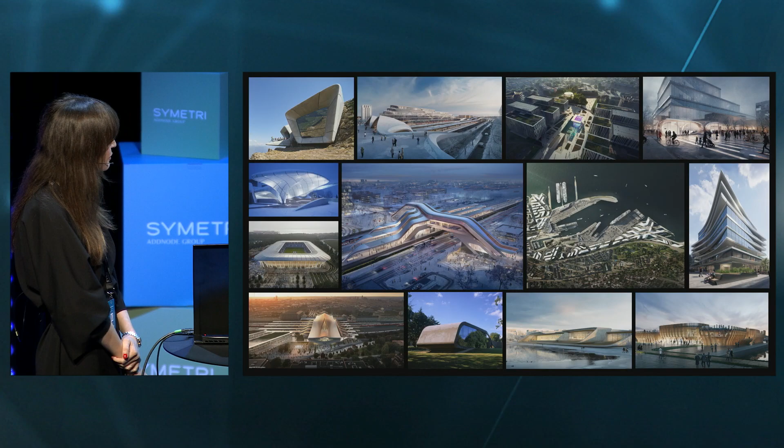We've been actively working in the Nordics on various projects, from master plans, transportation projects, sports centers, culture buildings. And we're really happy to present the two metro stations in Oslo for the Fornebu line. The Fornebu line project is a new metro extension in a continuous tunnel system between Majorstuen and Fornebu Peninsula. Zaha and A-Lab, together with PGF for FOB, have been designing two stations out of 6, Fornebu and Fornebuporten.

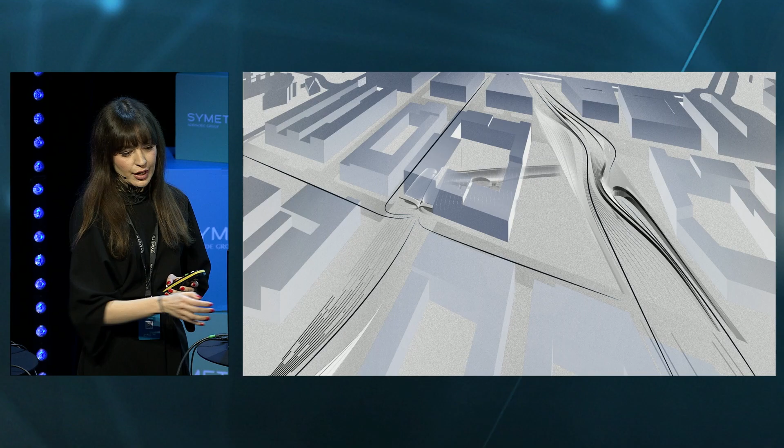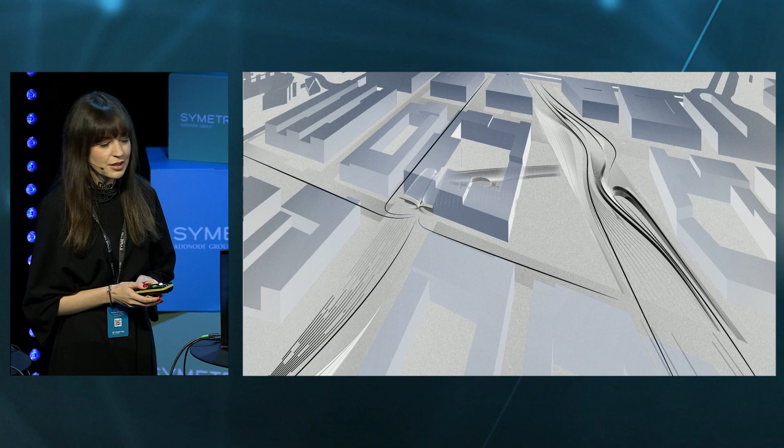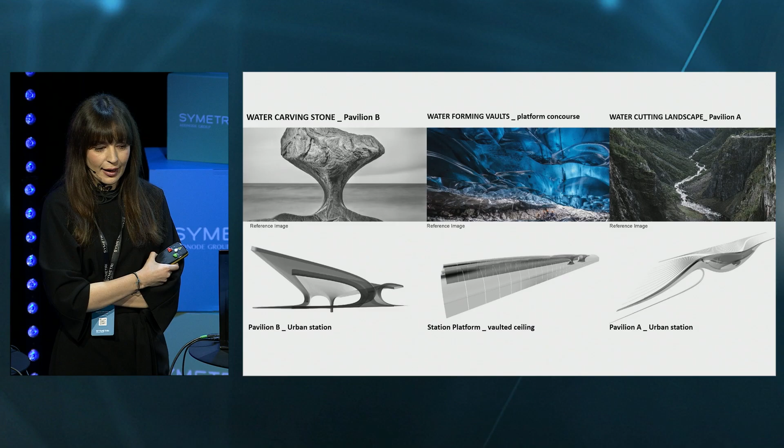The Fornebu station is also the final station on the line, and it aims to become an architecture attraction within this emergent urban development. The design is inspired by how Norway's landscape has been shaped by pressure and currents of water and wind and glaciers for thousands of years. We took the inspiration from these natural forces, and the design is using the landscape as a unifying element, shaping spaces and movement for people.

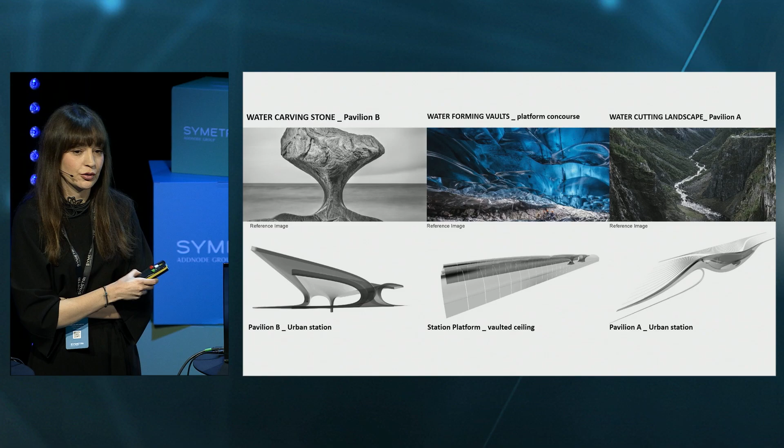The Fornebu Railway can be seen as an underground river that connects places and individuals. It results in a concept that is robust, urban, but very simple, with a strong architectural identity tied to the context. Then this underground landscape is creating spaces and shaping entrances and platforms, creating new focal points in the urban environment with a strong identity, at the same time creating a very poetic connection with Norwegian landscape heritage. This is the image of our Pavilion B entrance and the Pavilion A from the competition.

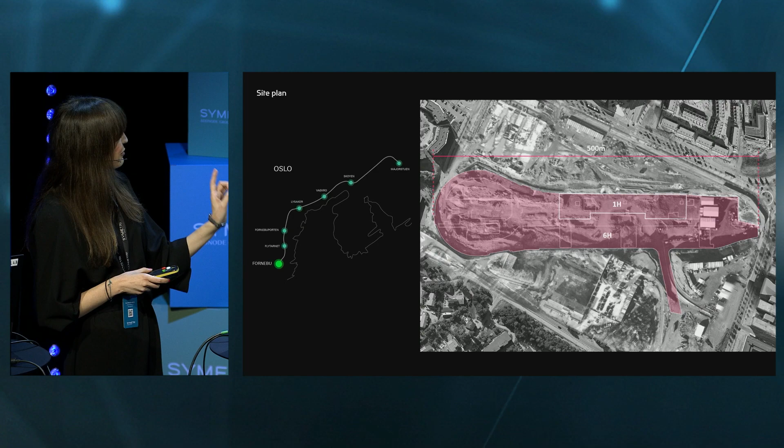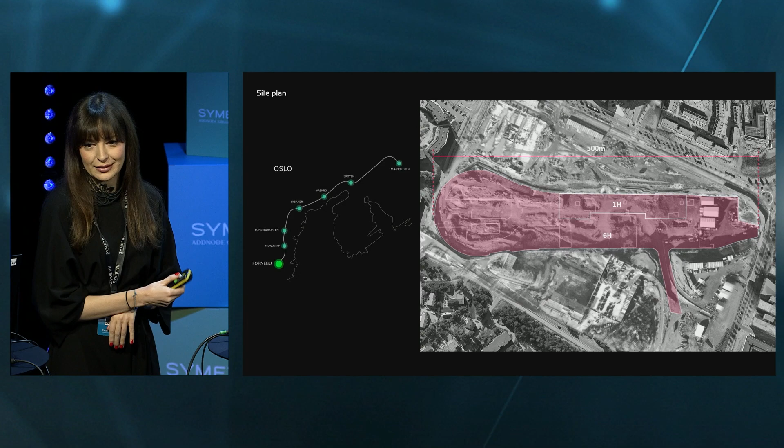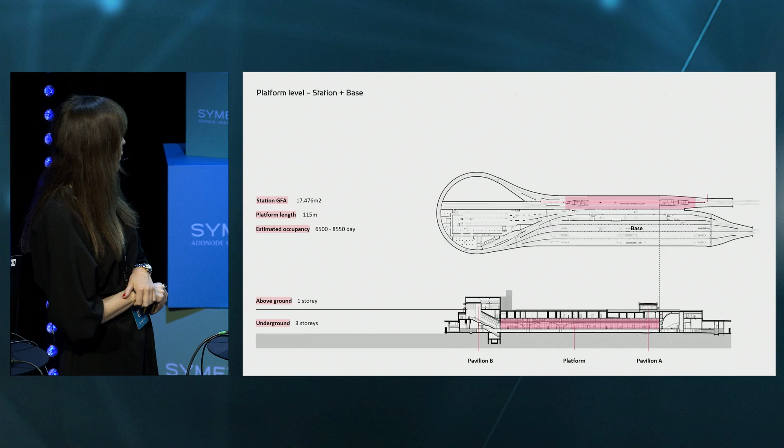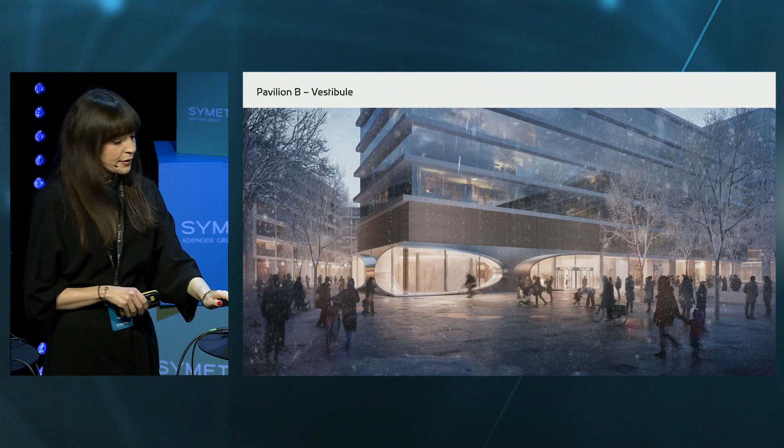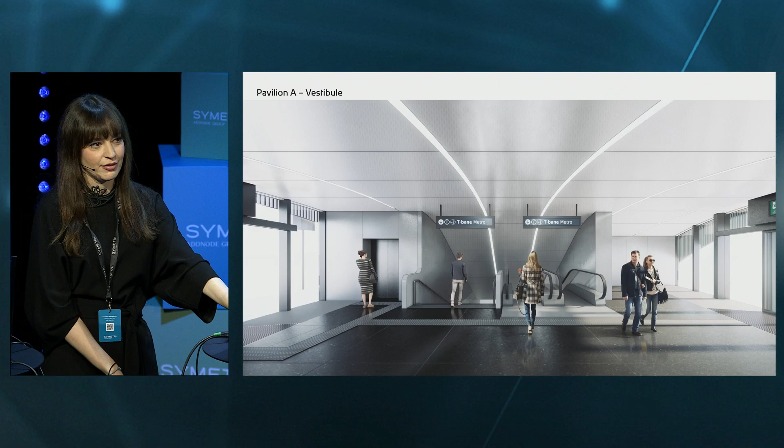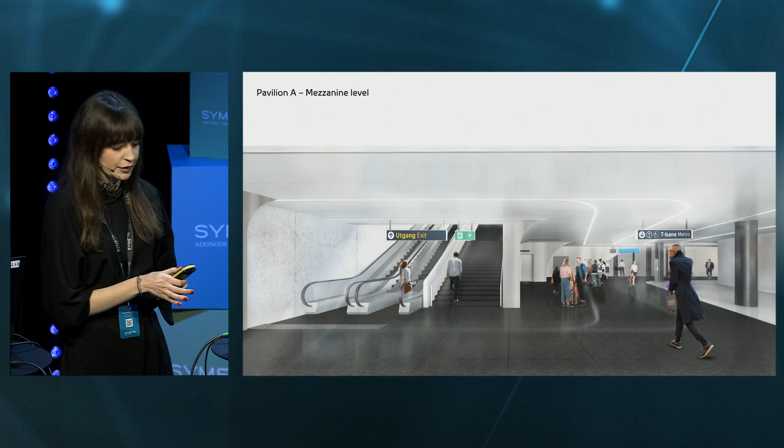and Pavilion B. The interiors are designed as very bright and open spaces, very easy to navigate, and create a sense of security for the travelers. The finishes mostly range in gray shades with some darker notes, creating a very clean and warm environment for all the users. Here you can see some of the renders.

The platform. So the platform design is actually inspired by underground glacier caves, where these white vaulted ceilings curve down and then reflect the stone bed below. So these curvilinear shapes of the walls are generated by sculpting a geometrical sphere out of a tunnel rectangular shape. So then this volume becomes a multitude of intersecting geometries and suggests a modern interpretation of this natural glacier formation.

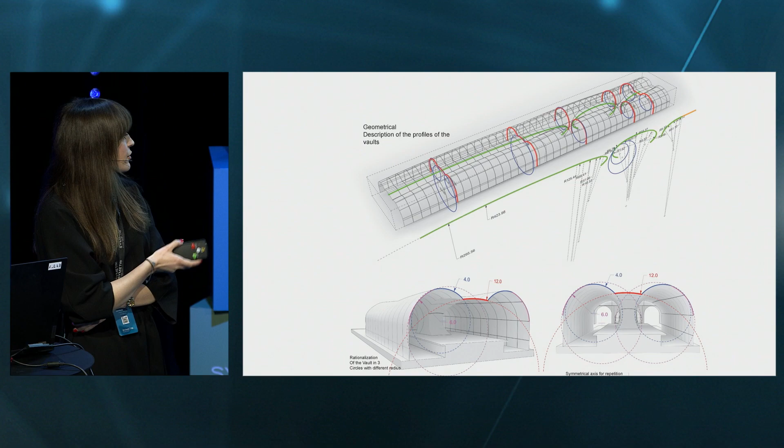Then these vaults curve down in places to become columns, and meet the stone platform surface below. The vaults have been rationalized, resulting in only 3 circles with different radii and a symmetrical axis for repetition.

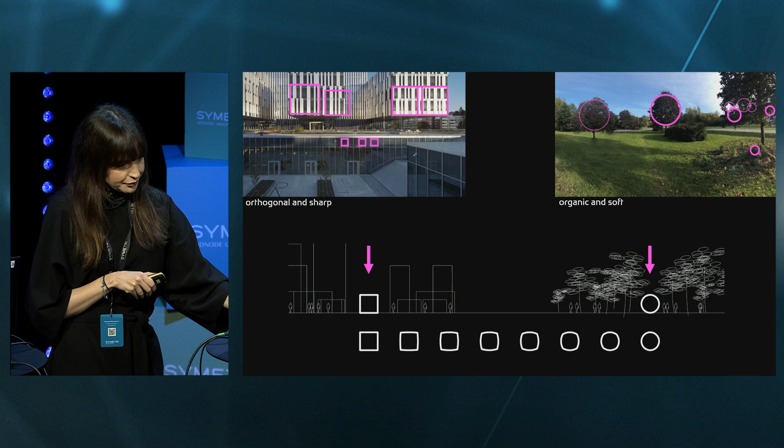On the other hand, the Fornebuporten station has 2 very contrasting personalities: an urban environment, center of commerce and technology, and a natural environment. So these 2 very strong opposites are represented in the station's entrance design by a simple square and a circle. This station aims to create an experience in a cold place like Oslo through color and movement of light. So the 3 main features of the design are clear orientation, physical and mental well-being, and a sense of wonder.

The concept of sky below, an underground sky, is based on the effect that light with the right color temperature has on human psychological and biological processes. So during the time spent on the platform, a person's senses are being bathed with this modulated light. Their biological body clock is being reset back to the original circadian rhythm, and the mood is being improved.

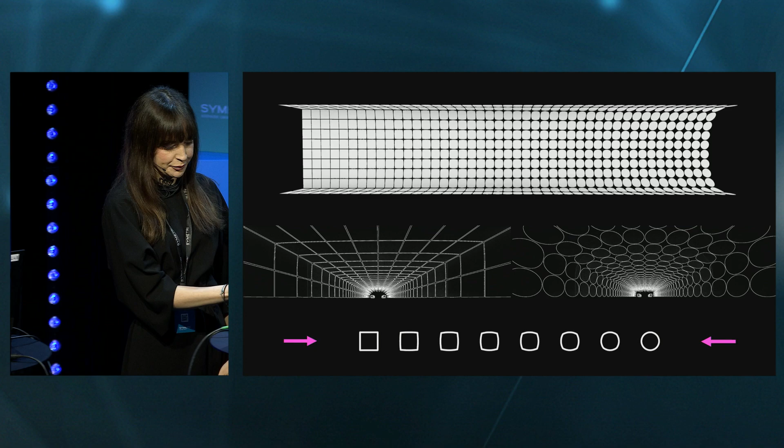So here you can also see the presence of the blend between the square and the circle, so you can always tell at which end of the entrance you are. This lighting system is also simulating the sun's movement during the day, so the experience is never going to be the same because it's matching the exact position of the sun above.

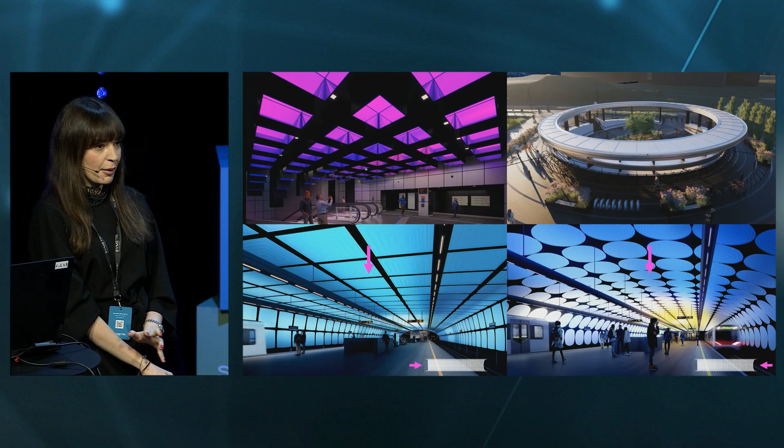So you're being 20 meters below the ground watching the sun while you're just waiting for the metro to arrive. It's quite an experience. This image we wanted to show the 2 entrances from the competition in 2019. And current design, the concept remains the same, but it has been quite rationalized.

We were really happy to have the full support of the client throughout all the stages, and we're still very happy with the result. But the collaboration of this project was really essential, because the project is organized by Oslo Fornebubanen, who is our client, Zaha Hadid Architects and A-Lab, and then PGF, which is Multiconsult and COWI. We were also working with Jason Bruges Studio and Big Analysis.

So since we are located in 2 different countries, our coordination meetings usually take a lot of time. So how can we reduce these meetings, make them more efficient, and also reduce our carbon footprint by traveling less and doing everything remotely? That's why we needed CDE. And in our case, this was BIM 360, a place and single source of information to manage all the graphical and non-graphical data. So the process and the project information is always available in real time in BIM 360 Docs.

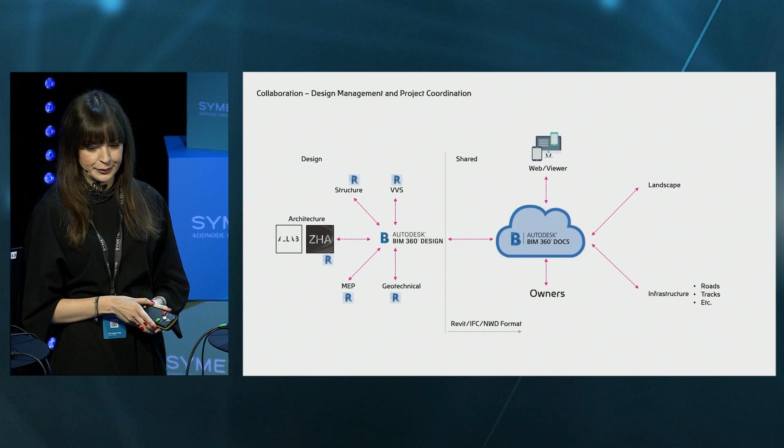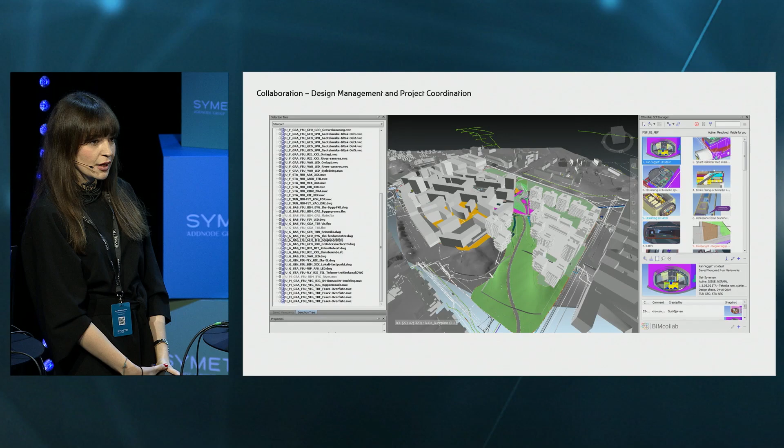It's very transparent, everyone can access the information. At the same time, the design team can sync their model through BIM 360 Design directly to BIM 360 Docs. So it guarantees that the latest information is always there. On this snapshot, you can see the amount of information that we have, very complex stakeholder picture, interfaces with the current metro and tram, soil conditions. So it makes this project really one of the most challenging transport projects in Norway in modern time. And the interaction was essential.

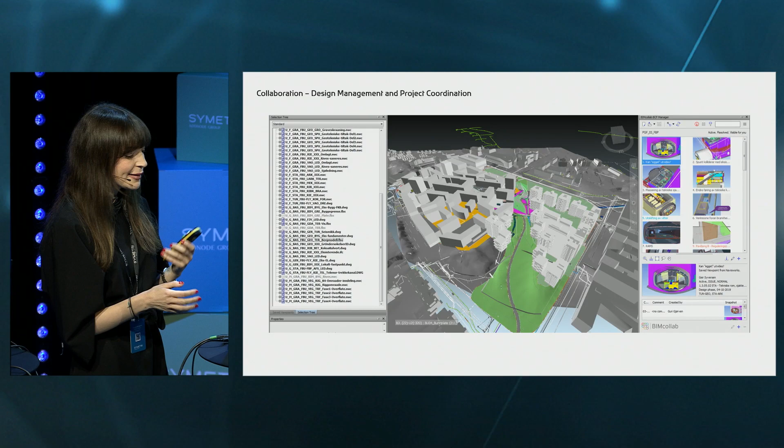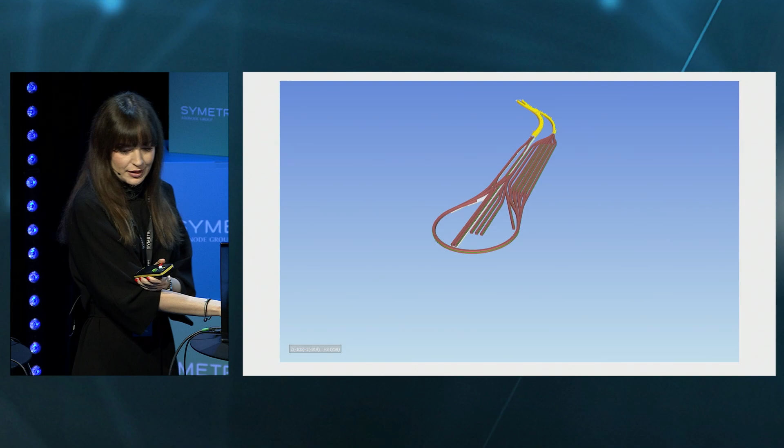You can see the type of data we have, the tunnels of all the station, the point cloud data, the terrain and rock formation, the area for the intervention, the train tracks and gauge, the master planning, the roads, and the architecture. In terms of BIM, process model control is done through status. So it's a very important property that each element, in order to go to next stage, needs to be coordinated with other disciplines. Now we'll see how we did this coordination.

We all know that BIM can decrease cost and time, but if we manage these issues inefficiently with a PDF and spreadsheet, we can lose a lot of time. That's why we use BCF, an open BIM format that is designed to define views of a model and its information on collisions or errors. Then these issues can be opened in any authoring tool, whether it's Revit, Tekla, or a viewer, and then they take you right to the issue of the element.

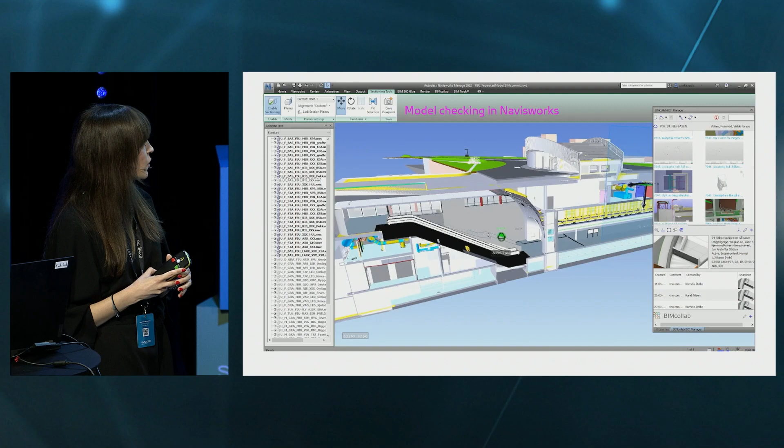So here you can see how we do our checks. We use Navisworks or Solibri to federate all the models. Then we do the checks. We either run clash detection or just general visual checks. Once we find the issue, we don't have to send emails and screenshots. We can just assign it, describe it, assign milestones, priorities, and it's all at the same place.

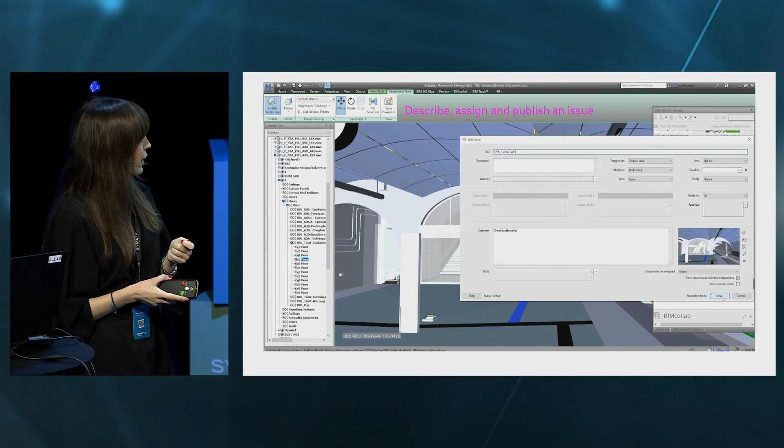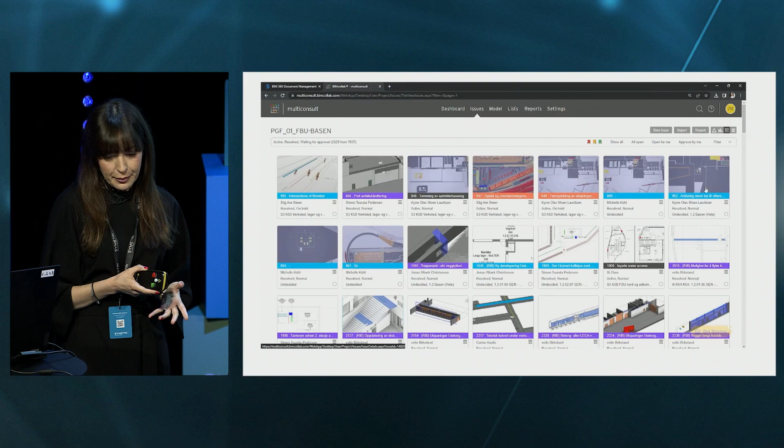So here you can see how we're doing it. And then it's always available immediately in the authoring tool and is ready for immediate check and correction. These issues are always available on the web, so we can make reports, get graphs, and we use this in our coordination meetings to check the process.

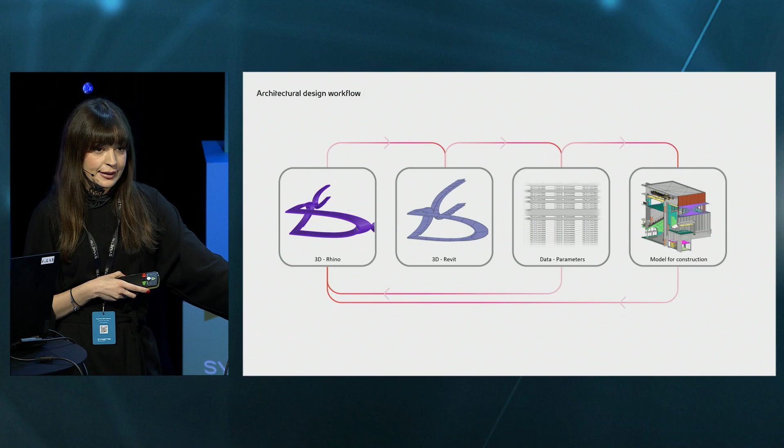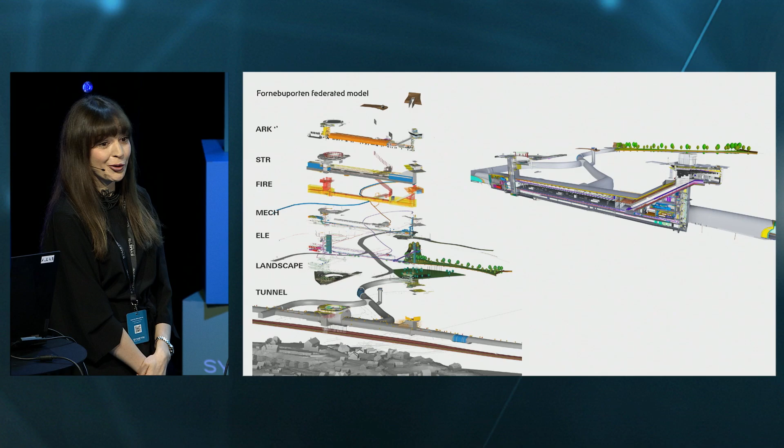In terms of architectural design workflow, we always work between Rhino and Revit because Rhino is helping us to work with complex geometry, and then the data is applied in Revit for a model for construction. Here you can see just one of the federated models of FBP station and the amount of disciplines that we were coordinating with, and some snaps from the platforms and from the entrances.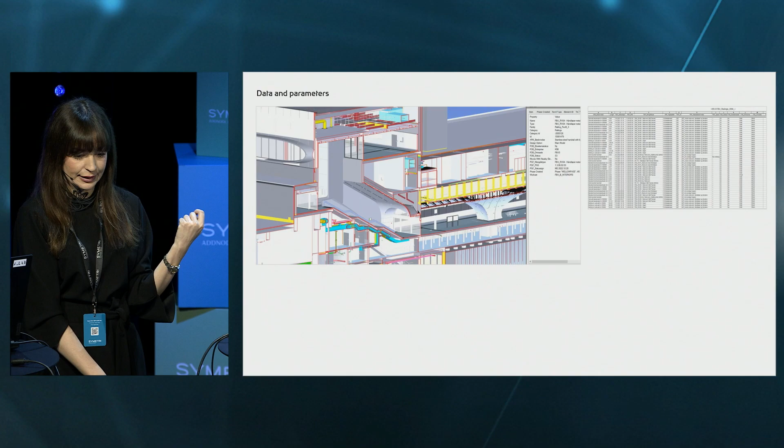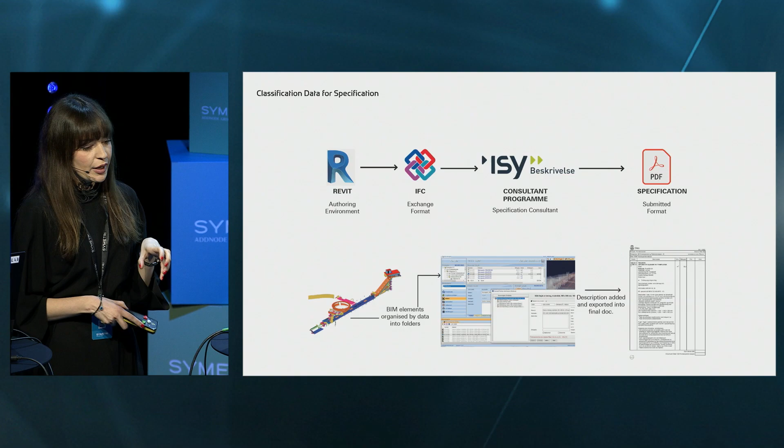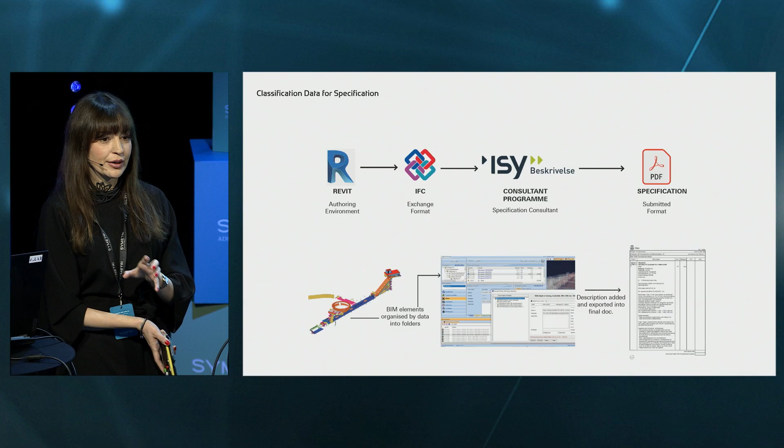Data and parameters are crucial for this project because we have a certain number of bespoke parameters that our client gave us, and they increase at each stage, defining higher and higher level of detailing. This data also includes Norwegian classification codes to automate basis for specification. So we apply the data in Revit, then through IFC it goes to our consultants' program, ISY Beskrivelse, where the elements are organized by data, go into folders, and then a final specs PDF is submitted.

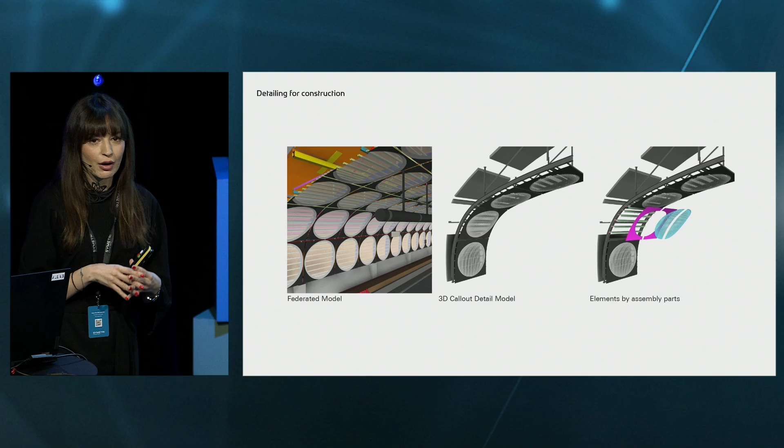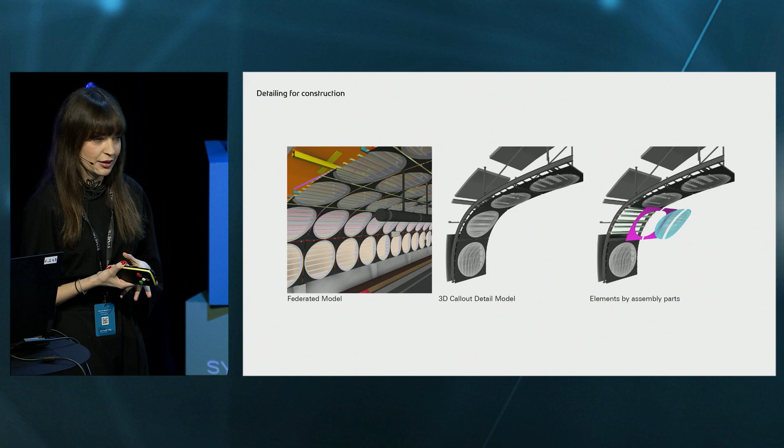It's very important to know that this is a paperless project, so by contract, we're not supposed to produce drawings apart from some exceptions for tender and planning. Therefore, we developed these 3D call-out models for our special, most precious architectural parts, and they're all also delivered in a BIM model. And here you can see some of the snaps of the platforms. Now I will pass you to Angie for a virtual experience.

Beautiful presentation and beautiful architecture. Everything that Zrinka showed us today is not only concepts, but it has been already realized in the digital environment. So today, instead of showing you a perfect off-the-shelf video that looks like a perfect product, we're going to try to have a demo live with my colleagues in the office.

I should probably let them know that we're starting. Where's my phone?

I said nobody gets into the room because it will be too loud. And we have a station for you, Zrinka. Always put your mask first, right? So here you just adjust it until it feels comfortable. And let's see. We don't need to save this now. I can see them there, so I'm not alone.

And then again, you know, we talk about collaboration all the time, but what is interesting for us is that distance and borders, it's not a thing anymore. It's 2023, right? So I'm going to try, to the best of my ability, not to move my head too much so you guys don't get seasick. But the experience, when it's immersive, is much nicer, so just come around if you want to test it yourself afterwards.

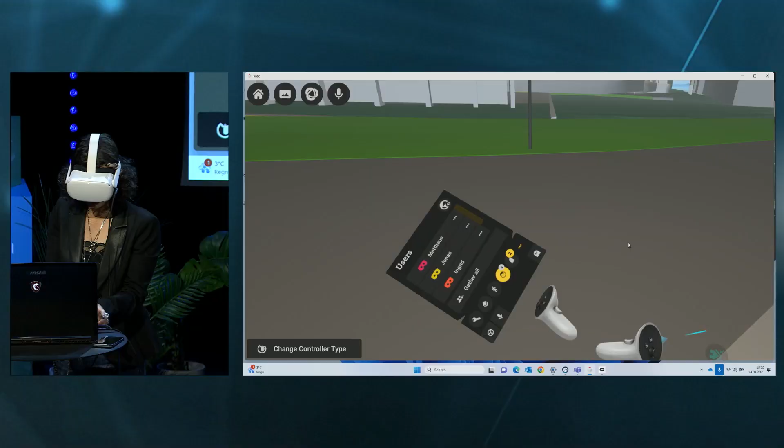Hello there. Can you guys hear me? Hey, hey. Yes. It's fine. Do you see only black? I don't see anything. All right. Black, but go on. All right. Hello.

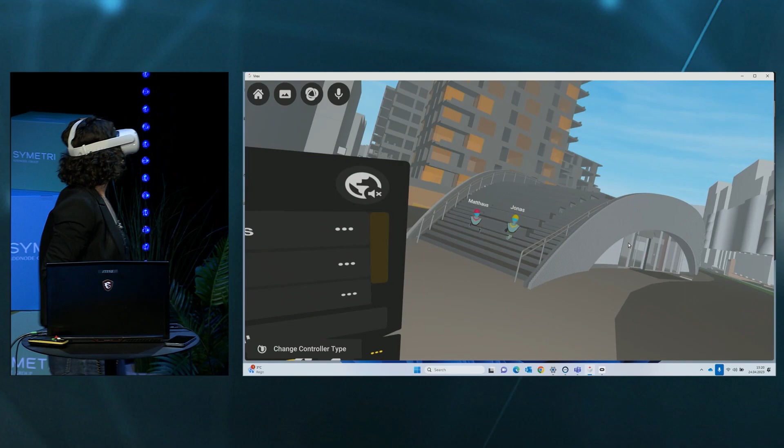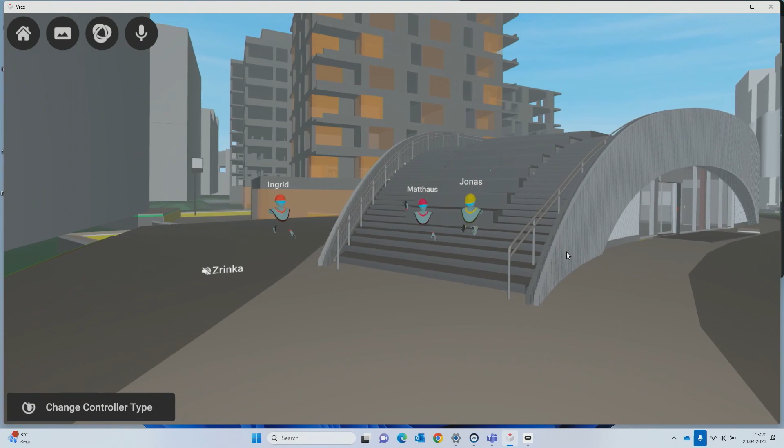Welcome to our presentation. Here's the audience. Let me introduce you to the team. These are my personal friends and colleagues, Jonas and Ingrid. They are working actively in the Fornebubanen station. And Matthaus, our BIM manager, they are joining us from the office in Skøyen. So as you can see, this could be basically anywhere in the world and in real time.

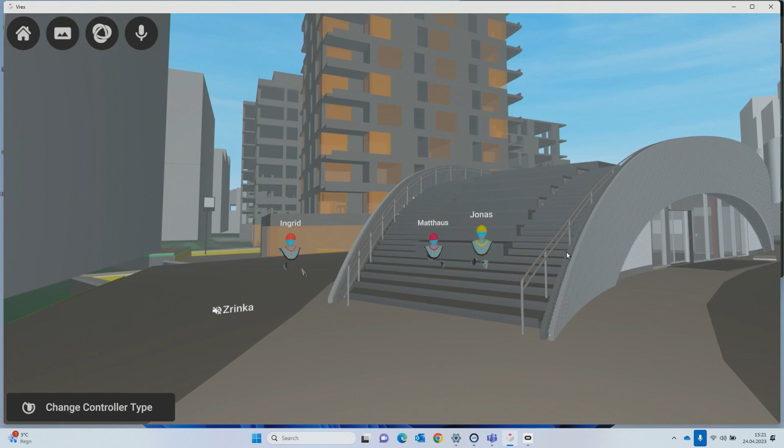We are right now in a platform called Vrex, which is social VR. It allows for multi-users. And as you can see by the graphics, this is not really a visualization model. It doesn't have a render engine. It's built around collaboration and BIM. So it's all about staying connected with all the disciplines. Let's take a look from above so I can show you a little bit how this model is built up.

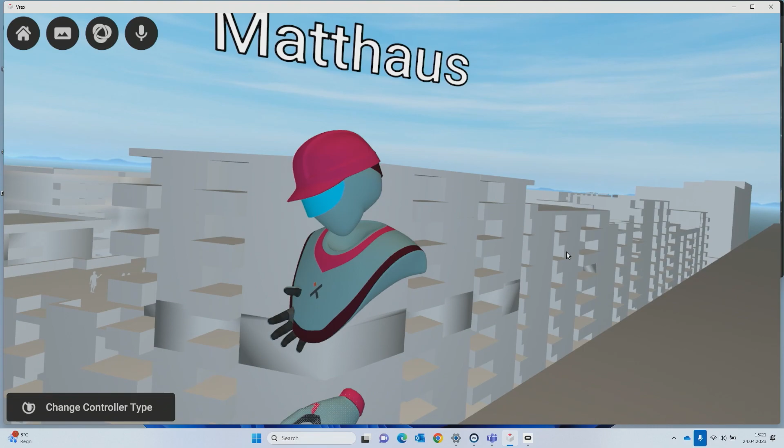Oh, okay. We're on the top of a building. Let me get to the edge. Ingrid, are you okay? She's not a big fan of heights. All good? I'm moving away. Do that.

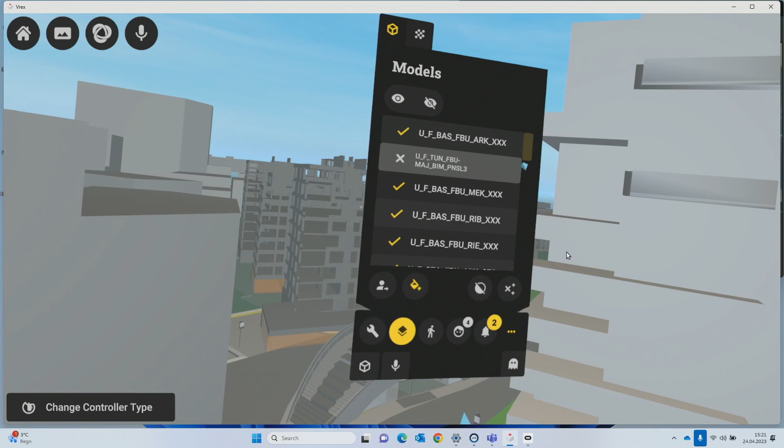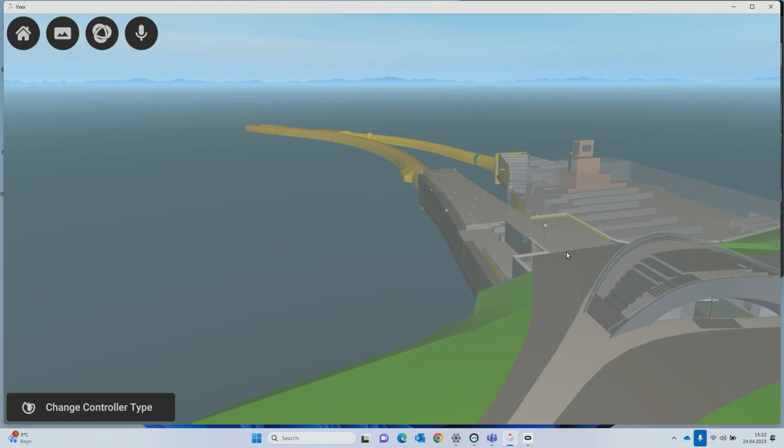So you can see the model from here. This model is made out of a lot of different parts. It's about 20 different models. I can turn off the context and the neighbouring projects just for you to get a sense of the stations that Zrinka just showed you. So this is the station. As you can see, this model could be experienced from the level of the infrastructure, as well as how the architecture melts within the urbanism, and going all the way into the station level and down to the 3D details that Zrinka was mentioning.

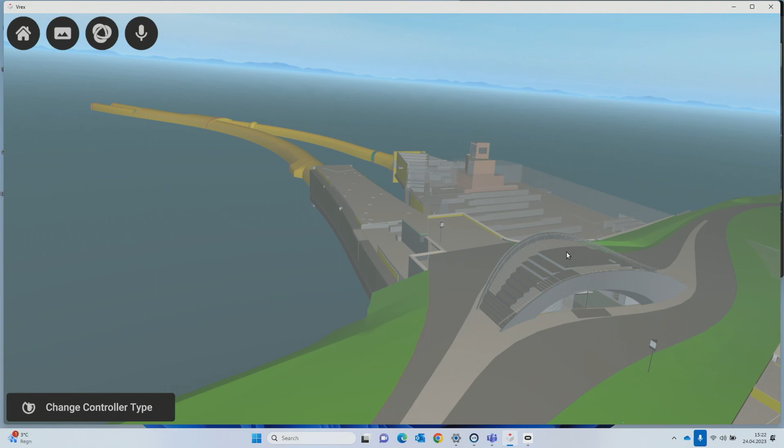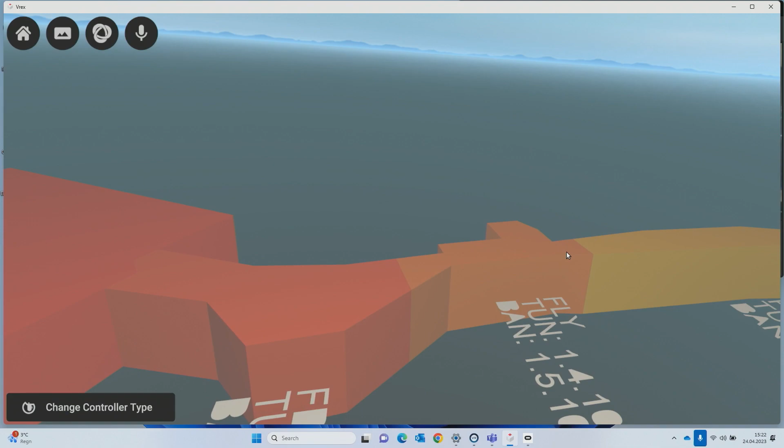So if we put this into the context, we could actually see the station in the frame of the entire Fornebubanen, which is a lot of large data. As you know, we are working in 2 different stations. This is the final station, and we are also part of Fornebuporten. Jonas, would you mind showing us which one it is? Yeah, that's right. That's Fornebuporten. It's the other one. And down here we have the end station.

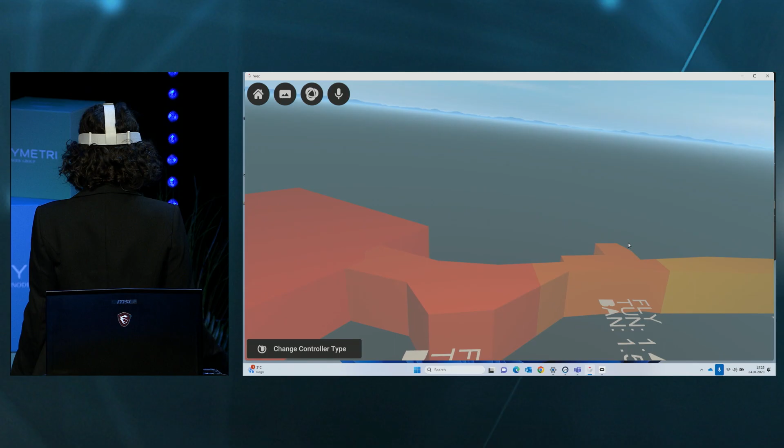So the Fornebubanen project could be seen as the river underground. And it's going to be made out of meeting places and, of course, flows of people. But let's go back to the station so we can see it in the context, because this river underground is going to be under a lot of very expensive properties. So for us, it was crucial to be able to see not only the project, but what is the existing situation. And that would allow us to really identify where is the potential and the need for transformation and intervention.

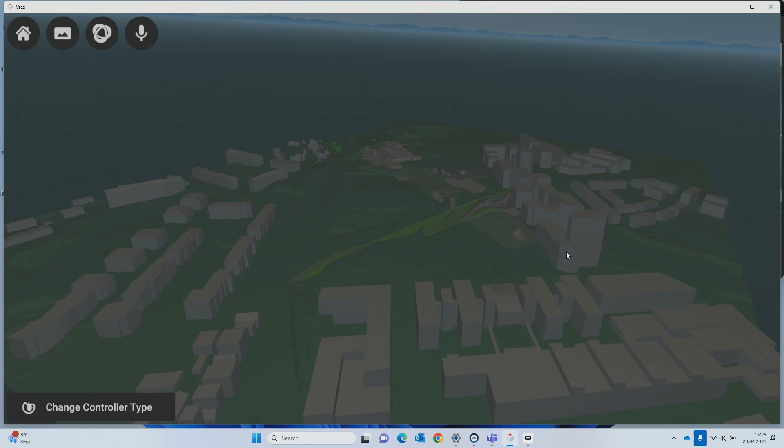So you can see here, this is the context. Down here, you can see our beloved, you recognize this building? Our beloved Equinor building. So there we have the 2 stations. Yeah, we can keep the landscape. It'll help us see where we are.

And in this model, we can look at what is going to be demolished, just to get a sense of the existing situation. And then again, where more precision is necessary, we have a collection of point clouds. And they're not showing. Oh, now yes. Don't be impatient, Zrinka. Here it is.

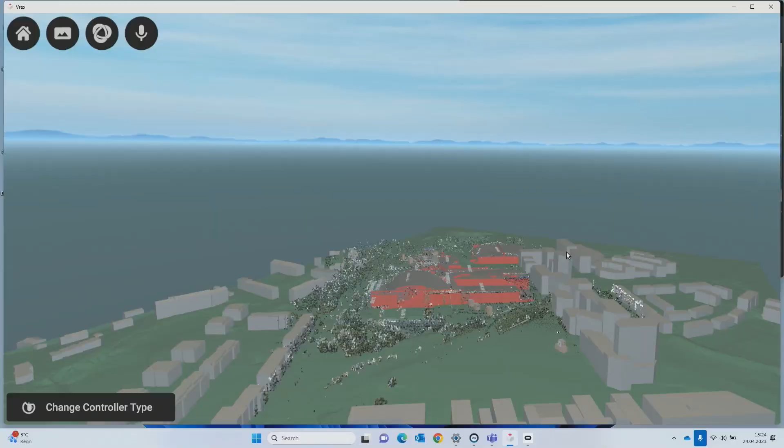Yeah, so everything that is red here is what originally was planned to be demolished. And you can see the point clouds. They are kind of not granular enough, but it's so large data that just for you to be able to see it, we keep them like that.

But isn't it true, Jonas, that most of these buildings have already been demolished? All the red ones have, yes. Yeah, so if you go to Fornebu, probably you will see just one huge hole at the moment. But the cool thing is that we can remove everything that is existing when the intervention has been decided, and then start bringing in instead the upcoming projects.

And this is an entire new district that is being conceived as we speak. So we have our 2 stations, and then there is a large quadrant called, how is it called, guys? It has a cool name. Coxa Quartal, I think. And it's going under regulation on a lot of processes, but if we can maybe see it in the context, you can see how the stations are an integrated part of these new public spaces.

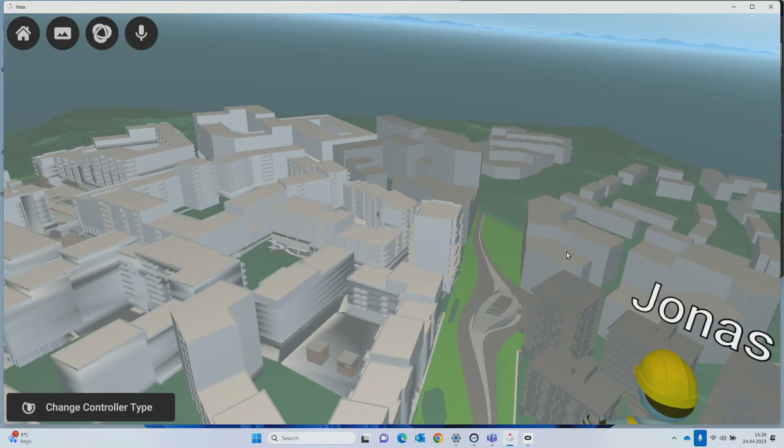We can maybe get a little bit closer so you can see more clearly. You guys are too close. So we have our pavilion A and our pavilion B down there. If we go down to the user level, this is a very privileged site because it has a landscape that falls down into the fjord. So it was a big opportunity for us to integrate that natural terrain within the architecture.

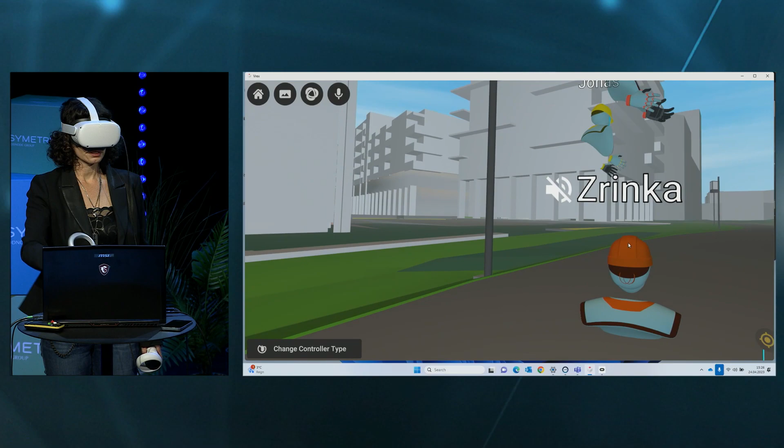So we can just go to the user point of view, which is a big advantage of working in VR because you can move around from the user perspective to a more engineering approach. So you can see here how the terrain will follow the architecture. And then here we have on the other side, let me adjust my position slightly. Over there, we have the other entrance. So if we turn off the context to try to focus on the pavilions again, you can see, yeah?

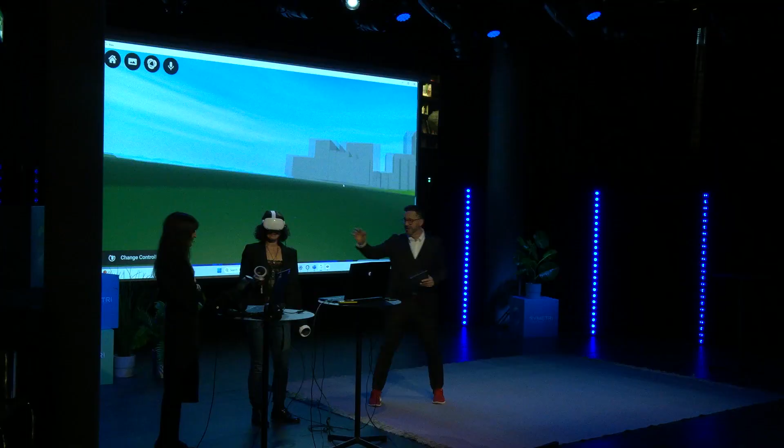This is your 2-minute left agreed upon time. I'm sorry, I'm not invited to the team meeting in the VR setting, so I have to do this IRL, okay? All right. 2 minutes, thank you. Thank you. I told you not to scare me and grab me from the back, so thanks for that.

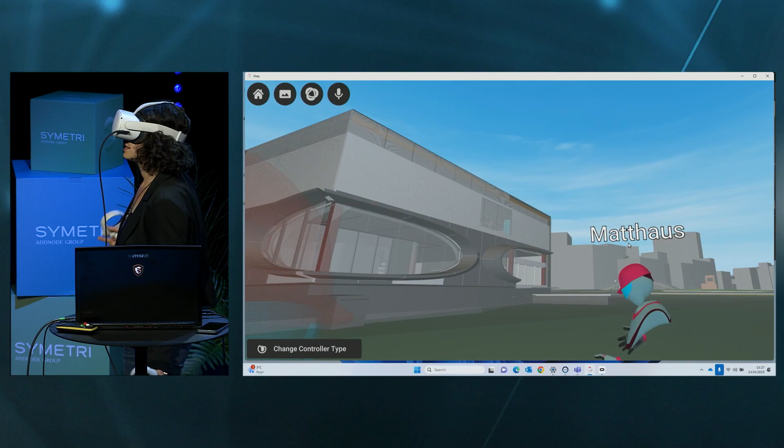Okay, so you can see here how this integrates within the environment. I'm going to bring my colleagues here so we can get a sense of... Matthaus, would you do me a favor and create the scale model so we can see the same geometry, but in a different scale, so Jonas can tell us a little bit about the functionality? Sure. Okay, you scaled yourself. Now we can look at it together.

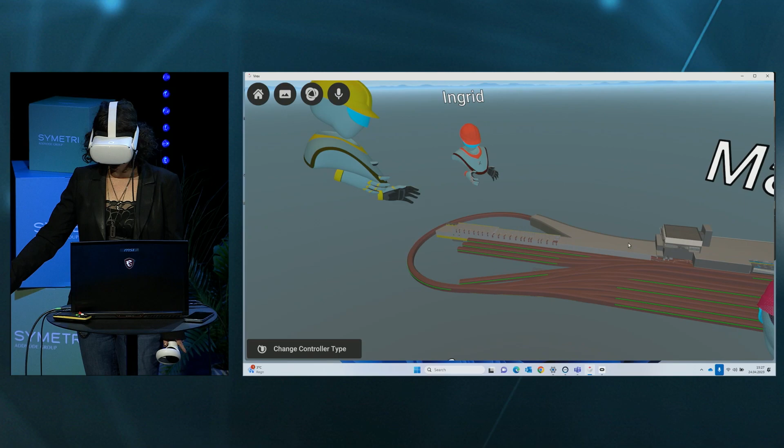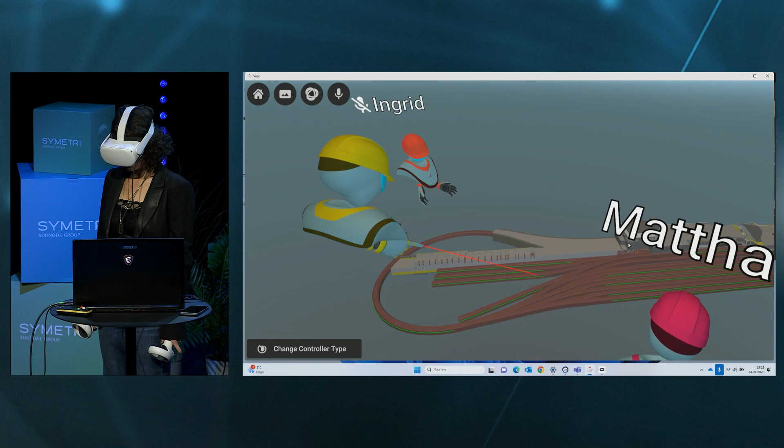So you can go back and forward. Let's remove the context now that we see where we are, so they can understand this is the station and the tracks. Jonas, can you tell us a little bit about what's the beauty of the base? Yep. So you have the station here, and just adjacent to it, we have the base. This huge area here will serve as the overnight parking for the trains, as well as the cleaning, both externally and internally. And over here, we have the workshop for maintenance of the trains. So no base, no Fornebubanen, I guess. Fair enough. That's where the trains go to sleep, like Zrinka said.

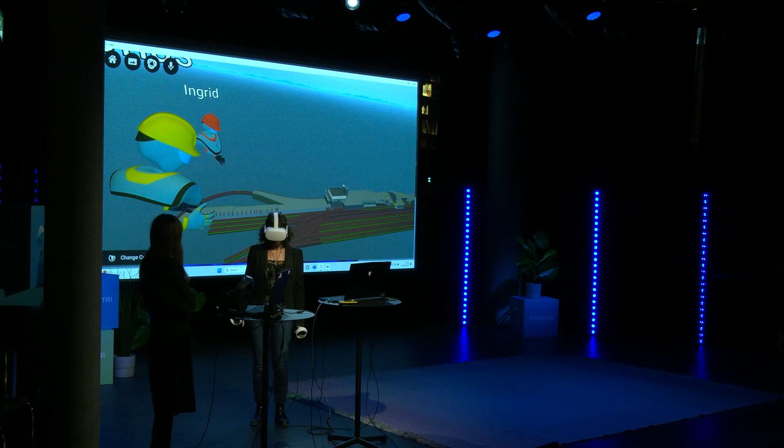Okay, Matthaus, take us to the section. Maybe we can just jump through the section that we saw in the PDF to see it working live. What is very important for us is that we can go one level deeper into the interdisciplinary coordination of the station itself, and then we can discuss just exactly as we are doing now with all the consultants involved in the project. And remember that for us as architects, the VR is becoming just the third screen, right? Where we can just get a call quickly and come inside a model and discuss things quickly.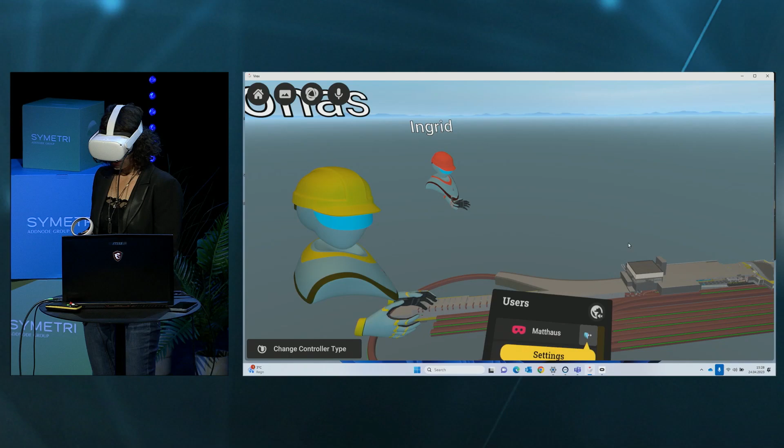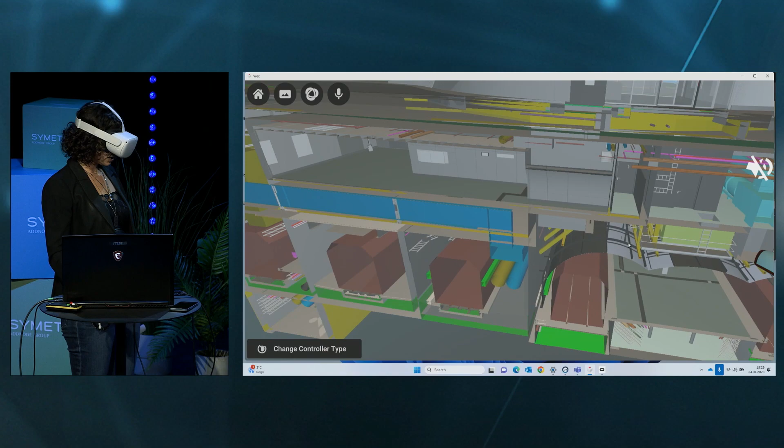So we can just look at this section. That will be the last thing we will show you today since we're running a little bit out of time. But here we have the complete model. So Matthaus is going to make a section to show us how all of this looks together. And you can see this is live data, right? And it's all based in BIM. So we have the opportunity here to real-time cut through things and discuss things with our consultants, turn on and off different models and so on.

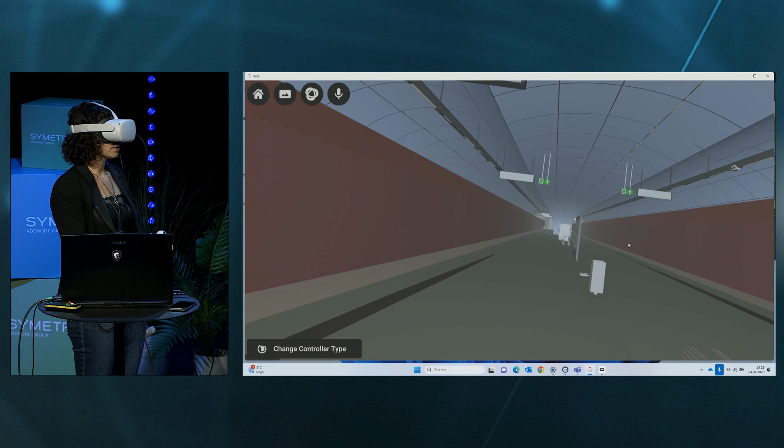I'm going to take you quickly inside the station. And just for you to know that the possibilities are unlimited, and for us it's very important that we give the opportunity to everybody to have this democratic discussion where everybody is engaged and feels included. And so the conversation is smarter and the project is better.